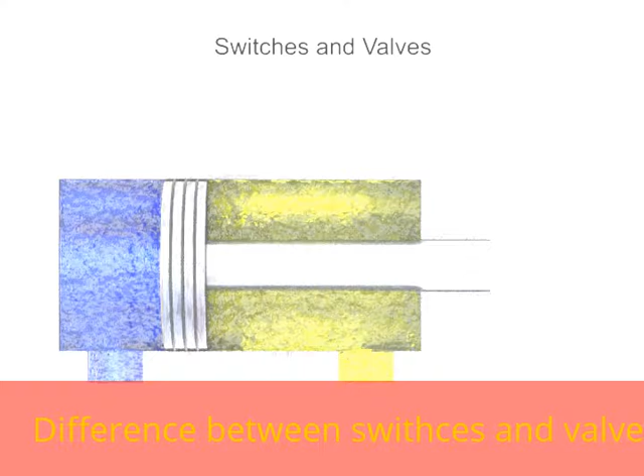The direction in which a cylinder piston will move or a fluid motor will rotate can be controlled by the direction of flow into the device.

A cylinder is said to reciprocate if its piston travels back and forth, being reversed automatically at each end of its stroke without human operator attention.

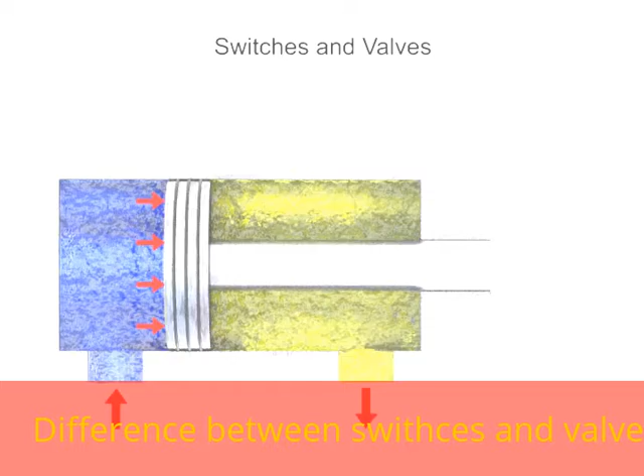In an air cylinder, automatic reciprocation can be stopped by an electrical action or by a shutoff valve in the airline. If stopped by electrical action, it will continue to travel until it reaches one end or the other of its stroke. If stopped by shutting off the air, it can be made to stop anywhere in its stroke.

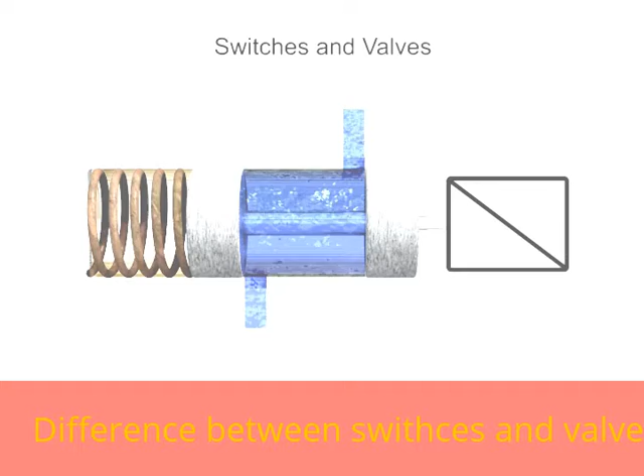Fluid valves are typically described as being either in the open or closed position. As described, the open position allows the flow of fluid, while the closed position prevents flow.

The normal position of the valve is defined as the position of the valve when its spool is unshifted and the power is off. This means that any mechanical actuators, such as springs, are in their non-actuated positions. Electrical actuators, such as solenoids, are powered off.

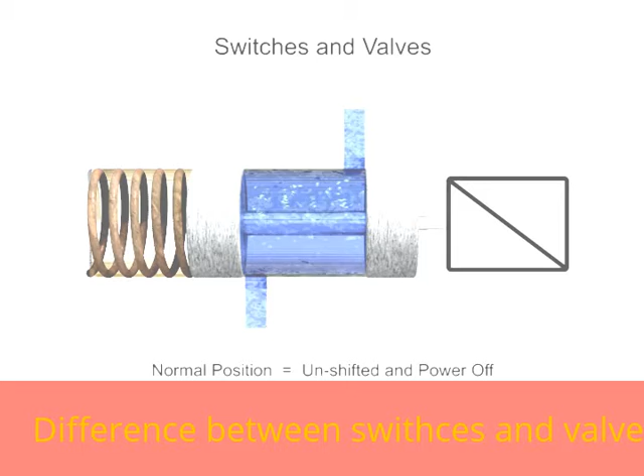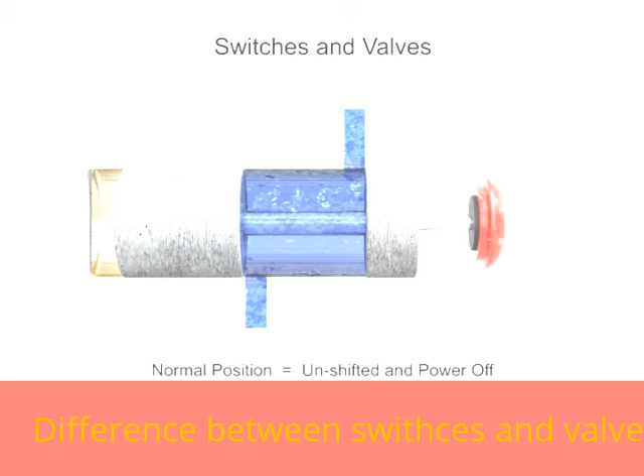The normal position can sometimes be referred to as the unshifted, de-energized, or unactuated position. Valves that do not have mechanical or electrical actuators do not have a normal position because they must be manually moved. When shifted, they remain in that state until manually shifted to another position.

The terms normally opened and normally closed are used to describe the condition of a valve when it is in the normal position. For this valve, the normal position allows unrestricted fluid flow through the open ports. Therefore, this valve is a normally open valve.

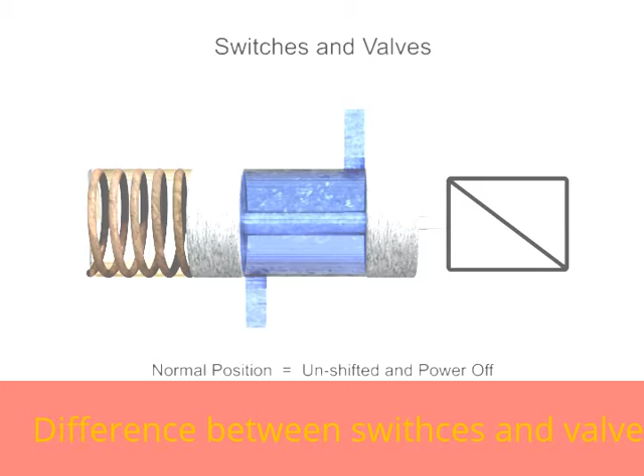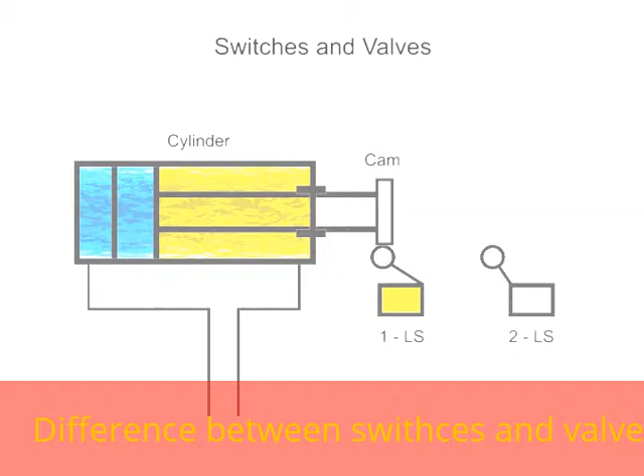As with fluid valves, electrical switches also have a normal state. In this case, the limit switch is operated by the movement of the cylinder rod. When the cylinder rod extends, it moves a cam which makes contact with a lever that actuates the appropriate switch.

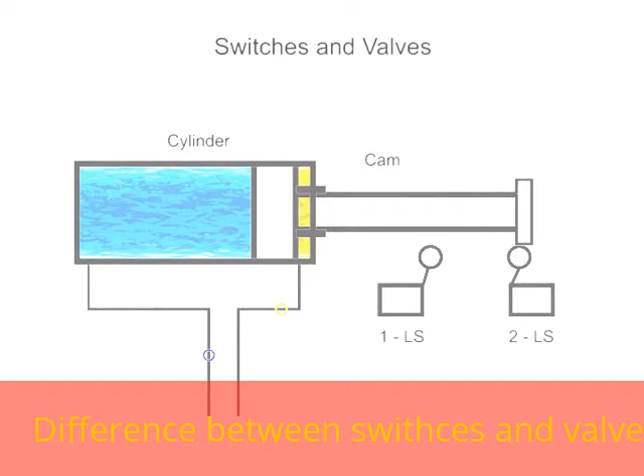The limit switch regulates the electrical circuit that controls the cylinder. Wiring diagram graphic symbols for limit switches are used to identify both its location within the electrical circuit and the state of the switch contacts.

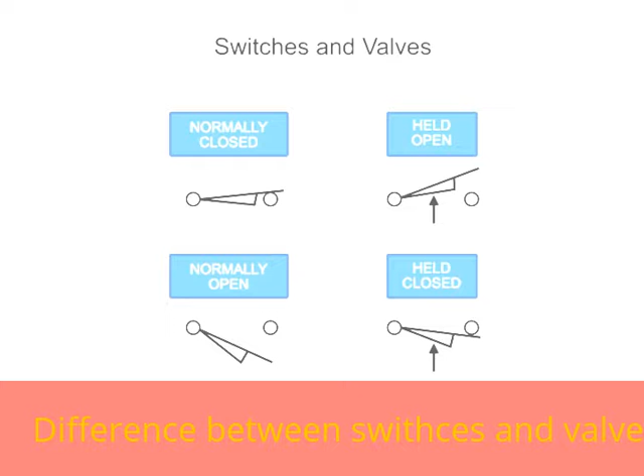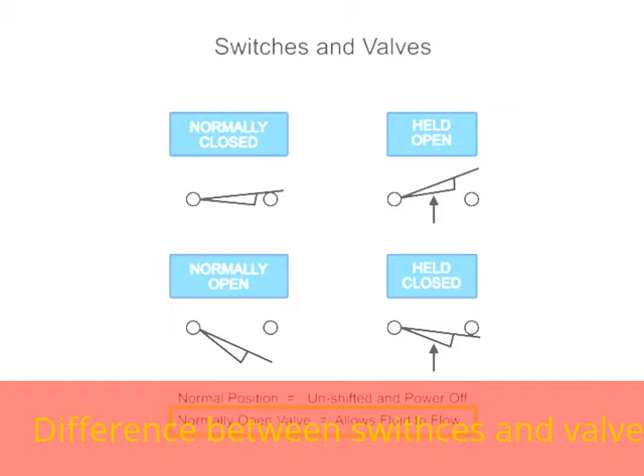The most common contact symbols show whether the switch is normally open or normally closed. As before, a switch is considered to be in its normal state when it is unshifted with the power off. While a normally open valve allows fluid to flow, a normally open switch prevents current from flowing.

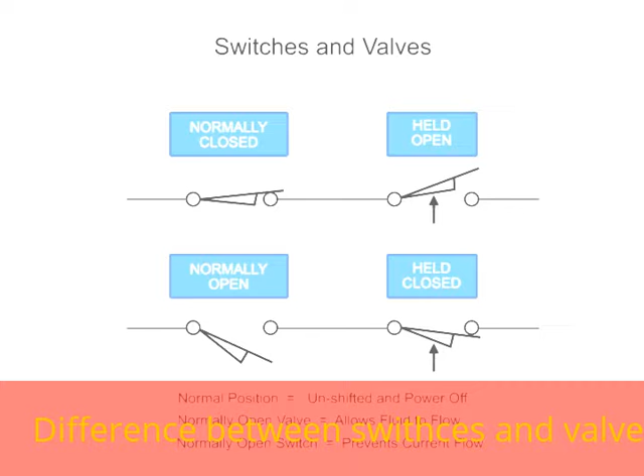Electrical current can flow across the switch as long as both sides are touching contactors. Circuit diagrams are typically depicted in their normal off state before any work has been accomplished and no cycles have started. If the switch is drawn above the circuit line, it is a normally closed switch.

If the switch is drawn below the line, it is normally open. Adding an arrow to either illustration indicates that the switch can be held open or closed.

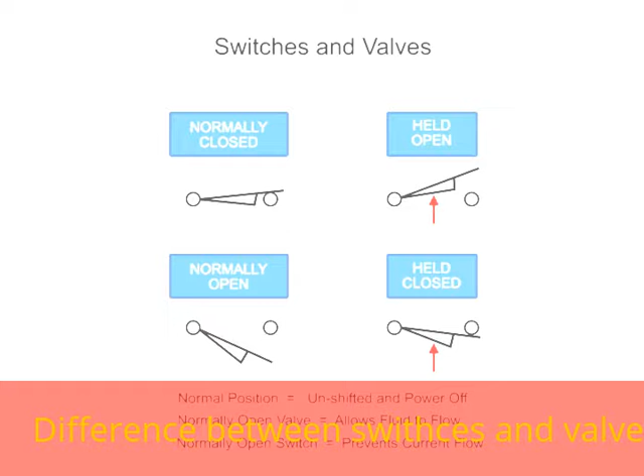For example, consider the limit switch, which is an electrical switch operated by the motion of a machine or presence of an object. In this circuit, there are two limit switches.

Limit switch 1LS is a normally open switch. The arrow shown next to the switch indicates that the limit switch is normally opened, but is held closed prior to the start of the cycle.

The other limit switch in this diagram is 2LS. It also is a normally open switch. However, at the start of the circuit, it is in the open position and thus has no arrow.

A holding relay is a necessary part of this circuit. Its coil is shown as a circle marked 1CR. Holding relays typically operate one or more relay contact sets. In this diagram, the holding relay operates one set of contacts.

The contacts are depicted as normally open. As with switches, they can also be manufactured as normally closed, with a slash mark depicting the normally closed state. This particular circuit illustrates the electrical relationship between limit switch 1 and 2 and solenoids A and B.

When the start button is momentarily pressed, relay coil 1CR becomes energized, allowing contacts 1CRA to be closed and connected. This allows the relay to hold a circuit through the stop button and contacts 1CRA.

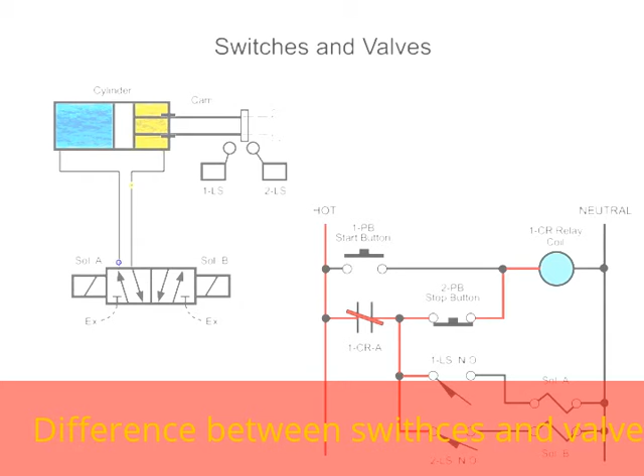When the stop button is pressed, the relay coil becomes de-energized and relay contacts 1CRA open, disconnecting the circuit. This removes current from the entire circuit and de-energizes both solenoids.

With both solenoids de-energized, the hydraulic valve remains in its current position and the cylinder will continue to travel in its current direction until it reaches the end of its stroke.

Since there is no power to the limit switches to engage the solenoids of the valve, the cylinder remains in its current position. Depending upon when the stop button is pushed, the cylinder may stop in either its extended or retracted position.

Understanding how electrical circuits impact fluid machine components can help designers and technicians develop the most effective systems for each unique requirement.